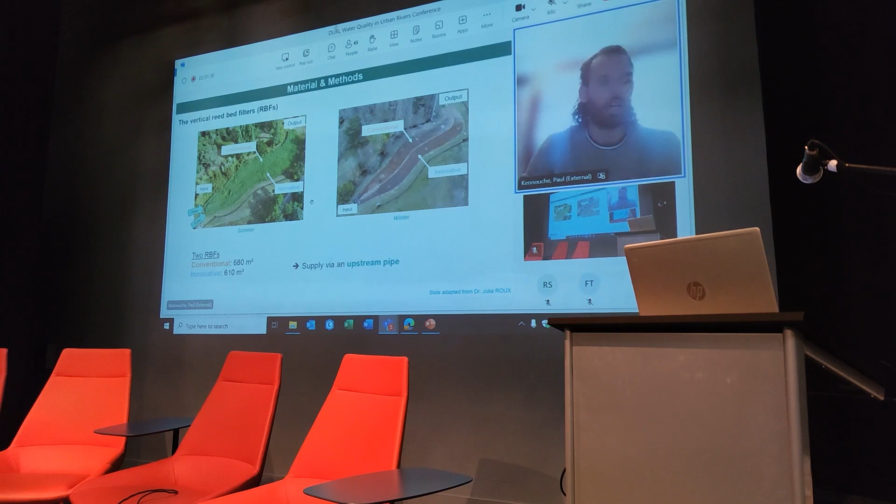What you can see is a difference in the composition of these filters. The reed bed filters - the conventional one basically has a filter layer of 40 centimeters, only composed of sand, while the innovative one is a mixture of sand and Rainclean. That's an industrial adsorbent substrate that we wanted to test in real conditions, chosen after lab testing. The rest of the filter is the same. There's drainage layers with gravels of increasing size, a drainage system, and that's about it.

So in the project, one of the aspects I'll focus on is the substrate, the evolution of the substrate and the contamination of the substrate. We see accumulation of sediment, so particulate matter on the surface, and these particles were studied, as well as the Rainclean and the sand, to see how contamination was deposited on the filters.

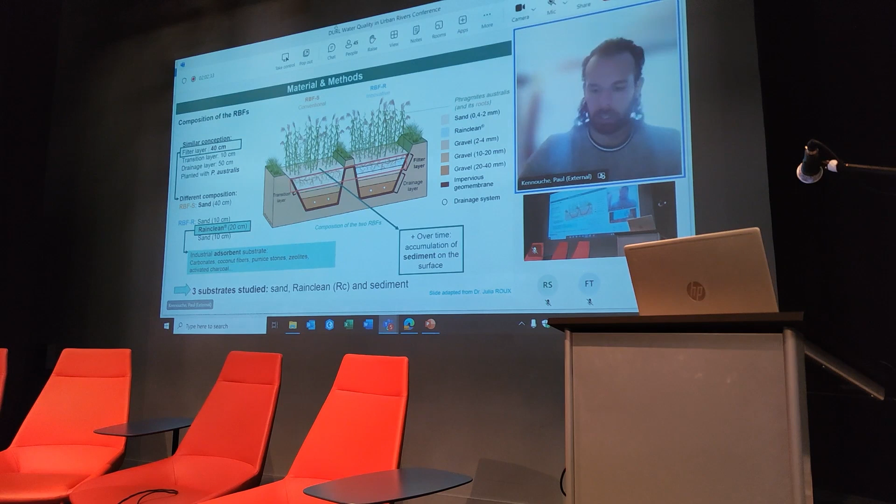We studied the physico-chemical properties of these substrates, the concentration of trace metals, of organic micropollutants, but also the evolution of microbial communities. Unfortunately, I can't talk about everything today, but that's what's been done on that.

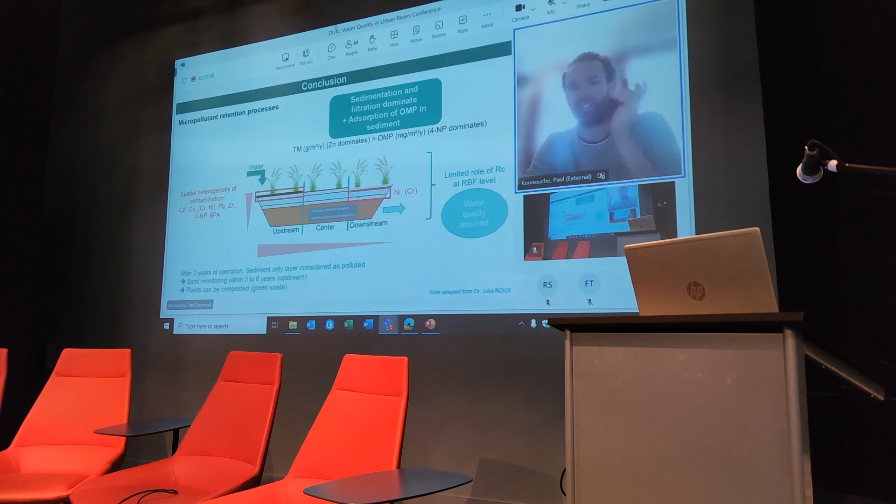I'm sorry, I think I was a bit long, but that's about it.

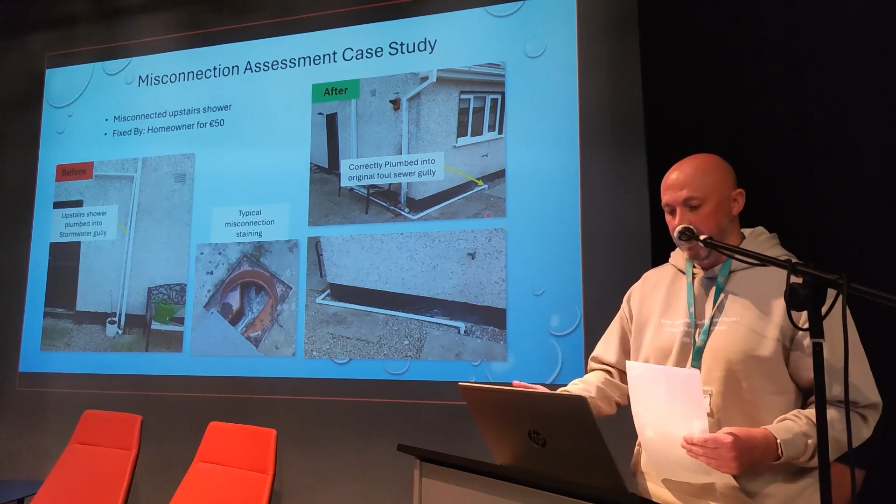We identified that for the homeowner and advised them of the correct fix. This whole fix here was fixed within 24 hours by the homeowner at a total cost of €50, as all he did was extend the pipe, went to his local DIY, extended the pipe around and into the correct foul gully. So an easy fix, €50. The homeowner wasn't in the trade, and he was able to do it within 1 day.

The second case study is an example of a misconnected washing machine in a side extension. The homeowner had only moved into this premises 7 months ago, and the previous owner had done the misconnection when getting the side extension done. They built over the side entrance and built the property there over the side entrance.

So this is a little bit more difficult. This one required a dye test. You can see here, we exposed the AJ.

We would have put the luminous dye into the gully, seen it going through the AJ, and then we would have chased this out just where the side wall is. The main road is on the far side, so we opened the foul and the surface manholes on the road, and eventually it trickles through, and we were able to identify it as a misconnection into the stormwater network.

Let me see, we'll show you the next one here. This work was then fixed by a contractor. What he did was he just ran a pipe up the side where the original misconnection was. He ran it up there.

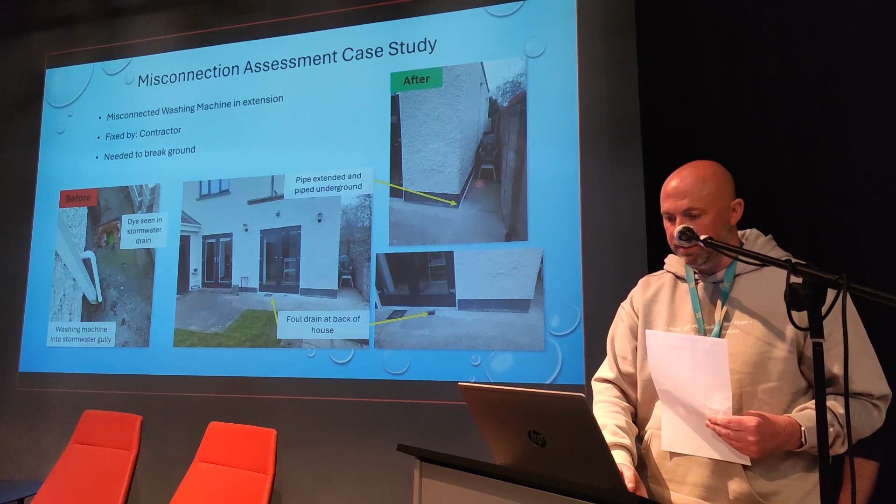So you can see here where the cursor is. What they did then was dug a channel from that point straight across into the existing foul gully. A neat job, as you can appreciate there. It's one of the best kind of ones that we've seen.

That was fixed at a total cost of €300 to the homeowner.

In our time as stormwater assessors finding domestic misconnections, most homeowners are very obliging in fixing the misconnection once they understand that their property is causing pollution to the local rivers, because they'd have kids and they may walk their dogs into local parks. So as soon as we explain it to them what's happening and what they need to do, 99% of the people are willing to fix it in a timely manner.

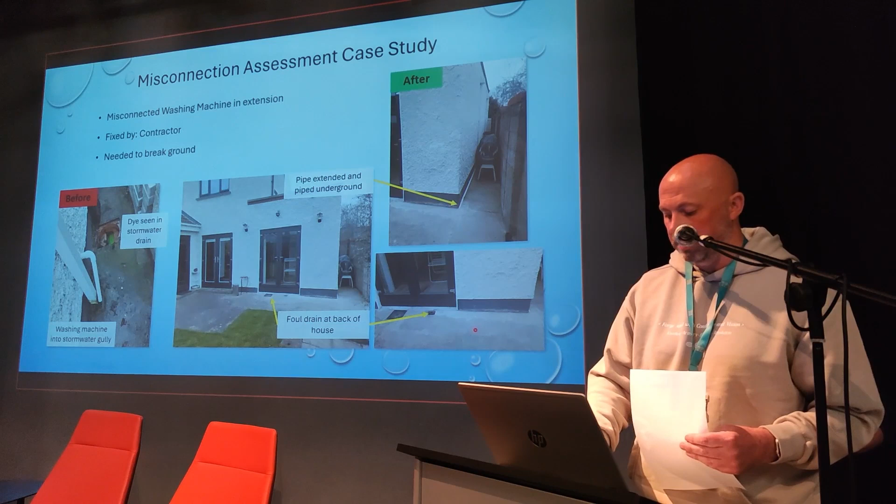Okay, great stuff. Good morning and thank you, Wes. My name is Jared Spain. I'm a stormwater assessor out in Dún Laoghaire-Rathdown.

Part of my presentation is engaging and awareness with the homeowners. Part of the process of engaging with householders is through our letters and our leaflet drops. The leaflets contain further information which can be gained on our website with regards to the project.

We have also carried out green estates demonstrations in housing estates, and we've been asked quite a lot of questions by the residents of those estates, and we answered them for them, and we dispelled some of the myths around what we're doing. And while we're in estates, people will normally come up to us, and as most people know, Irish people are curious, so they will ask us questions, and we will answer their questions for them.

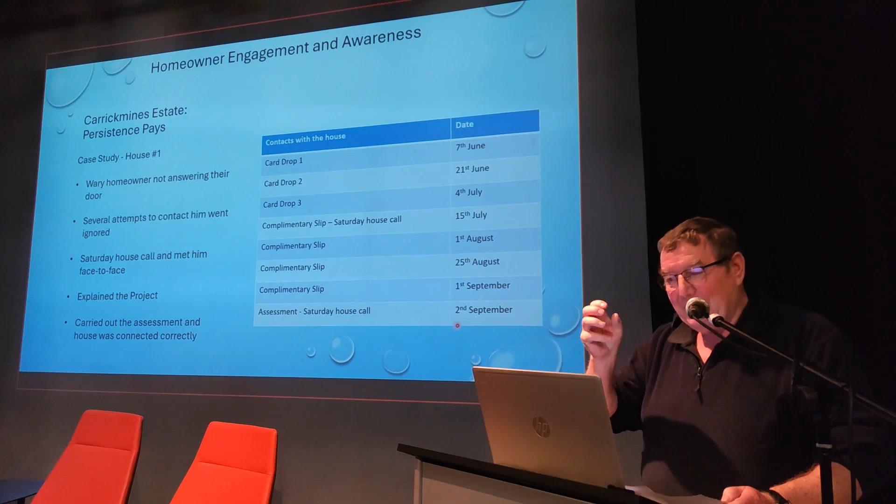We explained what we wanted and the project that we were doing, and he had no issue with us doing it. The funny thing was the guy was a building inspector and worked for one of the councils, so he actually didn't want us in the house. But when we went through the process with him, he had no problem with it. We carried out the survey. He was connected, everything was connected in the right places. His home actually had extensions to the back and to the side - he really had done a number on the house.

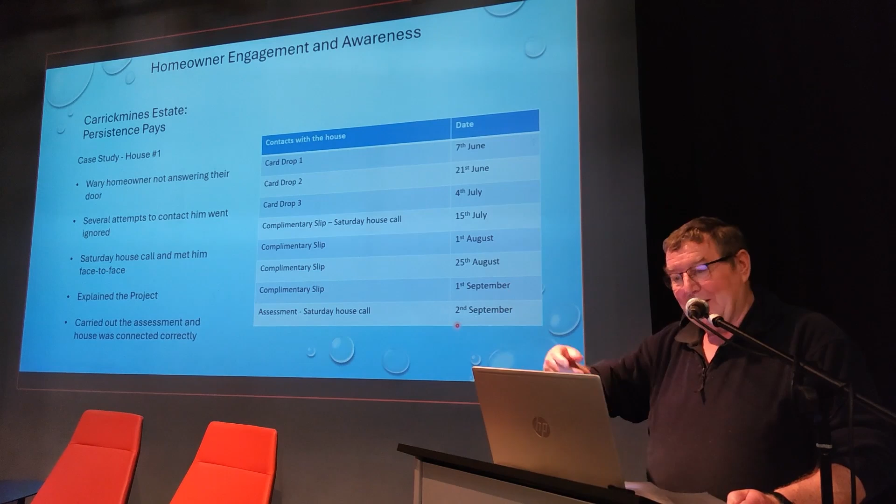He then informed us that he was part of a WhatsApp group for the estate. So I asked him, would he kindly WhatsApp his neighbours or other residents that we needed to survey the house. There were a few in there that we had got to the card drop 3 stage, and when he informed them what we were doing, we got access into those houses and were able to do it.

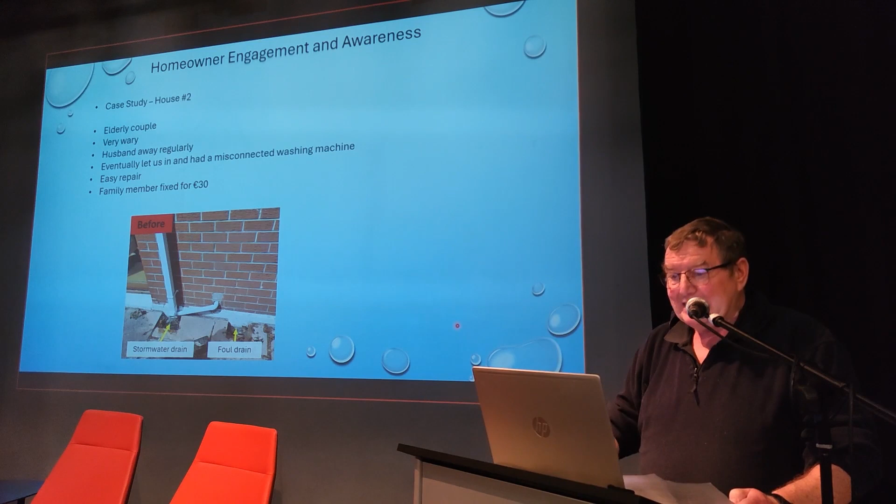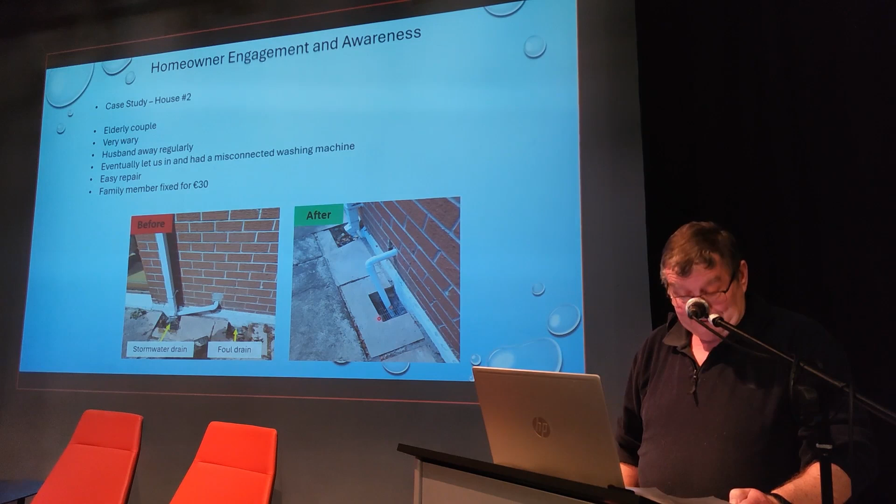We then made an appointment to come back at their convenience when both people were in the house. We carried out the survey. Unfortunately, they were misconnected, but fortunately they had a son who was pretty handy, and he did the repair, as you can see there. Thank you so much for listening to me. I'd now like to hand over to Fergal.

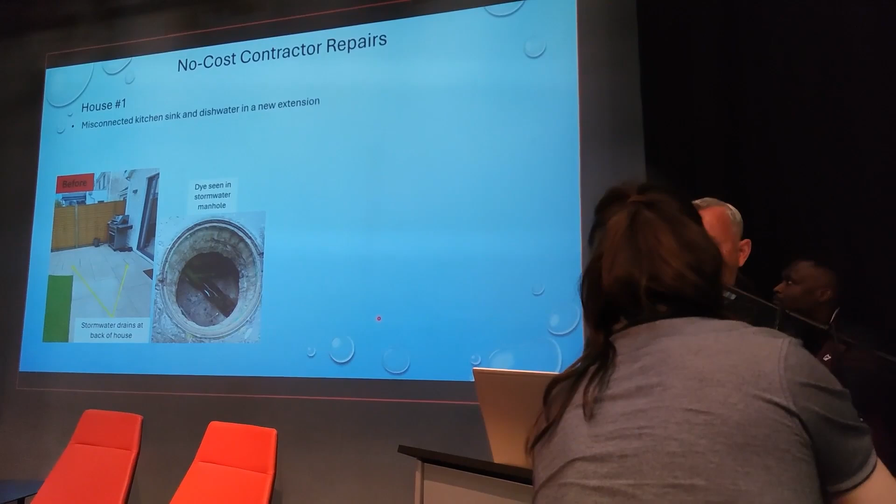On our day-to-day visits, we come across several different scenarios. Here's one where the lady has just finished, probably 4 months previous, a one-story extension - beautiful job, porcelain tiles, rear patio. We come in, we assess the foul and the surface water, and to the back here we can see the surface drains. We get the lady to pour some dye down her sink in her new island, and of course we trace it to the manhole out on the road, and it's misconnected.

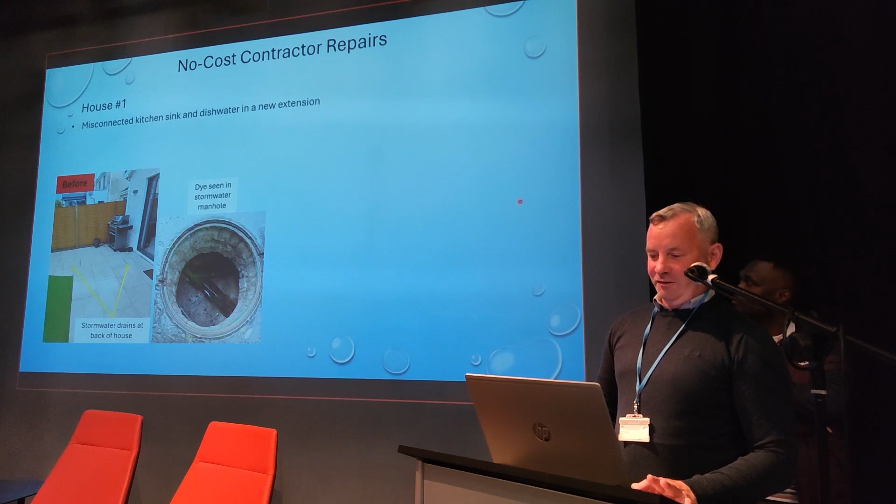Obviously it's hard news to break for a lady who's probably spent maybe 100 grand on a new extension, but we always try and work out the easiest way to fix it. So she contacts the builder, and the builder comes out, realises that he has mistaken the surface drain for the foul, and he reroutes the pipes round to the far side to the foul manhole.

Job done. In this case, the homeowner actually gets us out to examine before the tiles go back down, to make sure everything's 100%. So we gladly go out and we see that everything's been done correctly, and happy days - the homeowner, everyone's happy. So that was one.

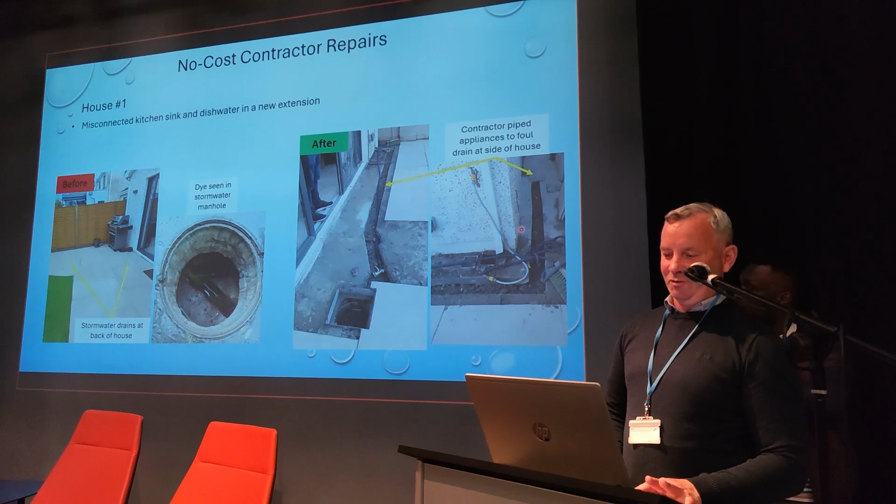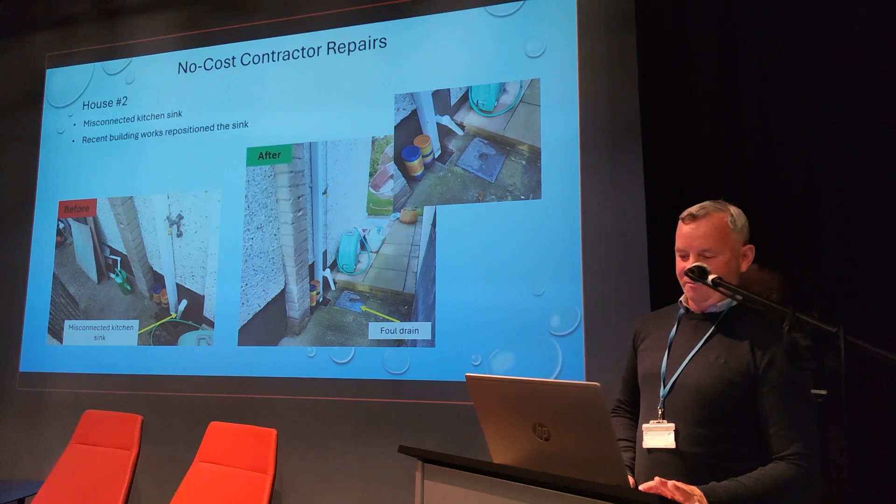Next one, homeowner had some minor works done in the kitchen. They had repositioned the kitchen sink, and the plumber inadvertently put the kitchen sink into the storm drain. Obviously the homeowner doesn't know till we come out and examine it, and they contact their builder. The builder gladly comes out.

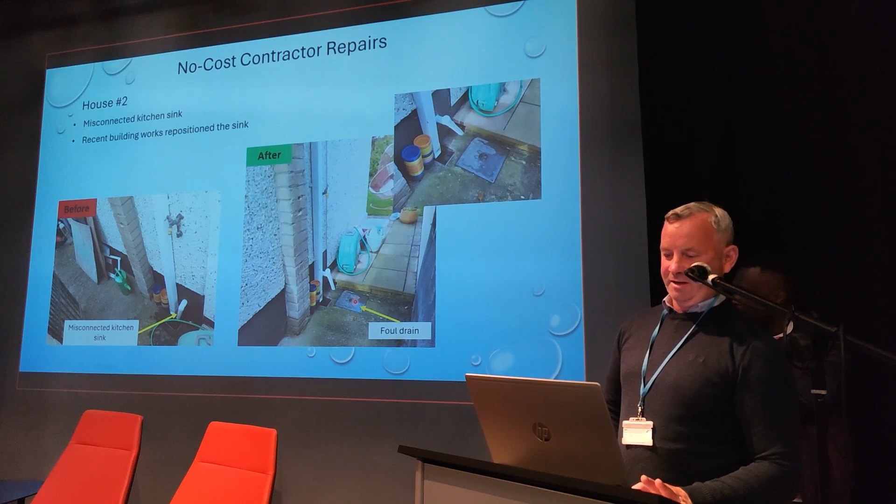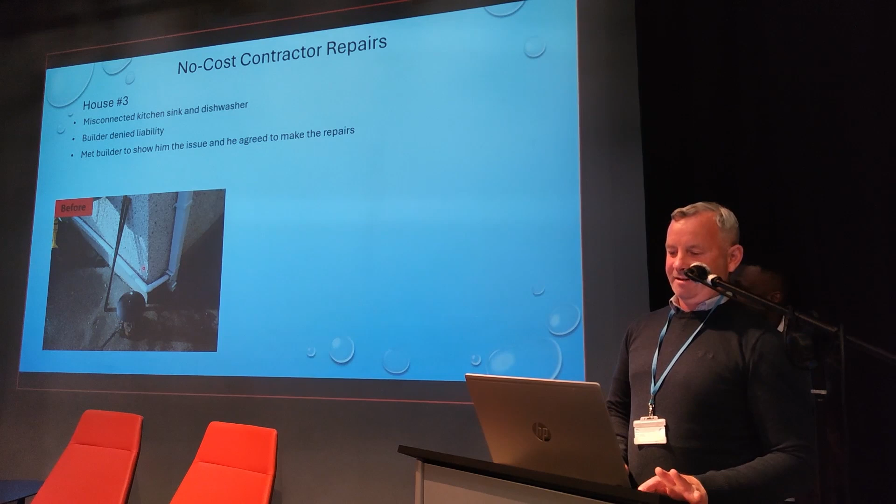Lastly, this was one that was to and fro for a while. The homeowner had renovations done, kitchen sink moved, dishwasher misconnected. The builder was denying there was any problem he had caused, but we arranged to meet the builder and the homeowner. We did the dye test, and yes, it's confirmed misconnection. We find a foul drain close by, so it's an easy enough fix. The builder agrees to come out, fix up, make good his work, and leaves it 100%.

Everyone was happy. By and large, in this project, we heard all the other speakers saying how hard it is to get into properties, but I think when you develop a rapport with going door to door every day, it's been pretty easy, and everybody has bought into it. I work with Wes on the team. We explain everything to the homeowners, and they're actually happy when the misconnection is found. As I always try, having worked in the building trade myself before this, we always try to find the easiest way to fix it and put the homeowner at ease.

Most of them, 95%, are easy fixes. They're actually glad it's been found, and no one wants to be the polluter. That's what I see out there. So it's been a very, very worthwhile project in that way. I'll just pass you on to the next speaker, Sylvester.

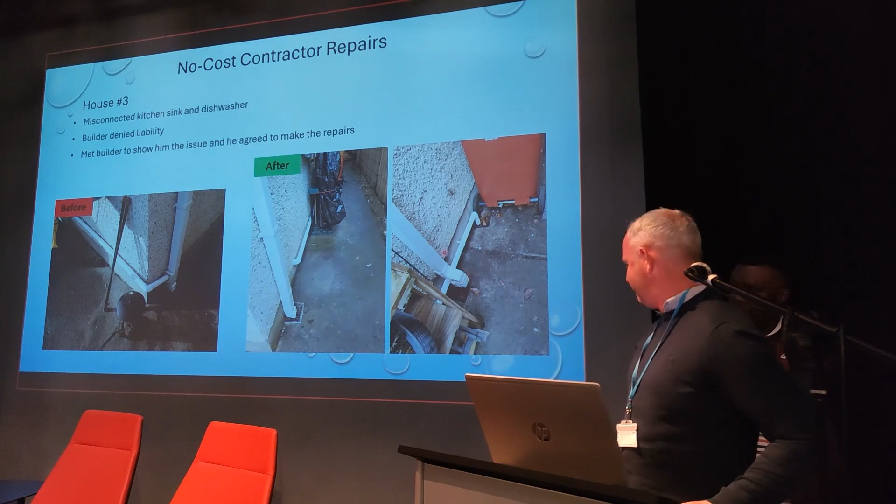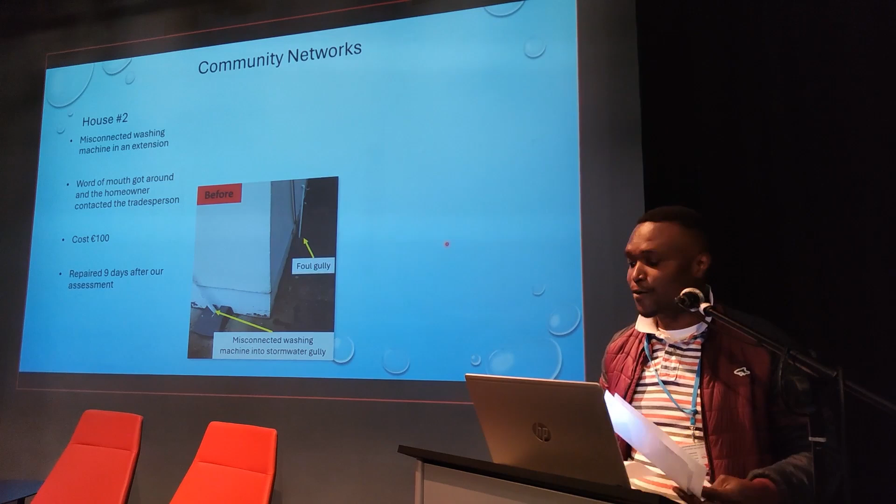The community networks. This is the second house that was also in the same estate. Due to the strong links between neighbors, word of mouth got around, and the same tradesperson was recommended to other houses. Looking at the example on the screen, he fixed this within a few days and charged a reasonable cost of €100. So, community networks work. This is the before and after, and this is the nice work that he did.

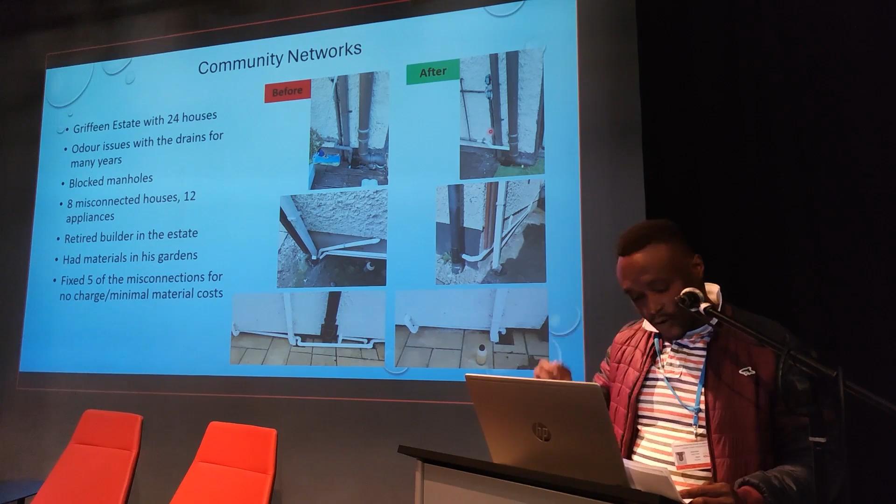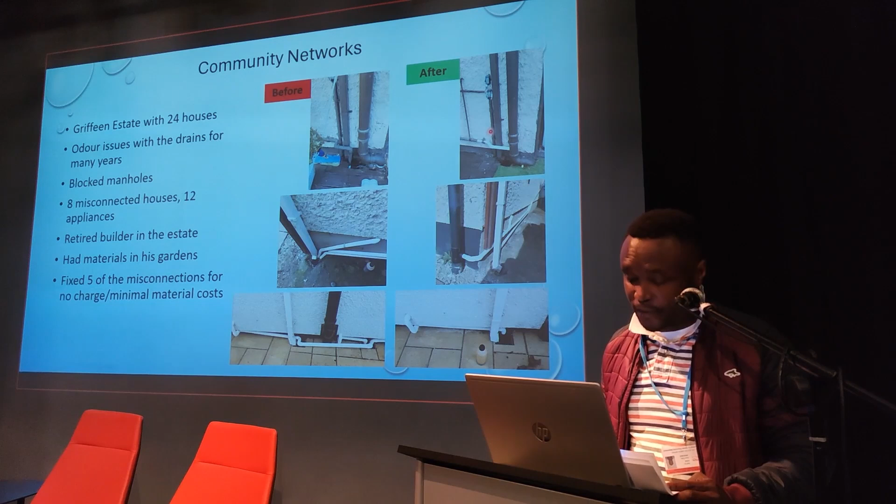Griffeen Estate. This is another estate that had a strong community network. Residents complained of bad odors. We needed to do a dye test and found that the surface water manhole was blocked and very polluted. We arranged for a jetter to clear the manhole. The residents were very happy and the odor issues resolved. They were happy to let us in to do the assessment, and we found sinks, dishwashers, and washing machines misconnected in 8 houses. A retired builder who lives in that estate had spare materials in his shed and repaired 5 of the misconnections at no cost or minimal material costs. The strong community network greatly assisted with getting the misconnections repaired in the estate.

This is the work of the retired builder. And so this is the end of the presentation. Thank you very much.